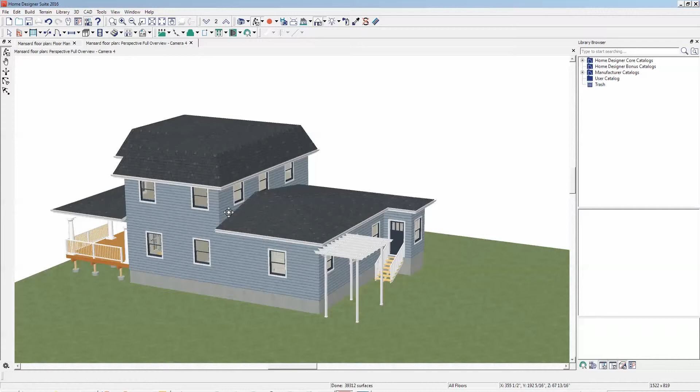Hi, as you can see, I've been working on this, and I'm gonna work on this back. I put a terrain plane in, and I've been fiddling around with the roofs, but I'm gonna go through the steps on how I arrived to here. Now, of course, the porch roof is just something I guessed at. You had a porch there with columns, so I figured you wanted a roof, and so I put a roof there.

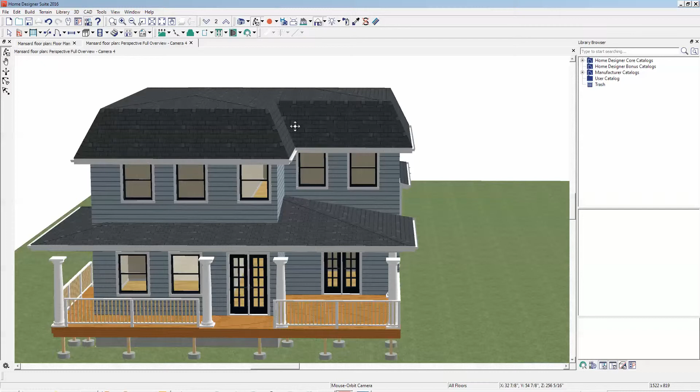But let's get started on this. How did I do the mansard roof? The first thing I noticed about your plan when I opened it was if you go over here to the build roof dialog. Where is that build roof dialog? There it is.

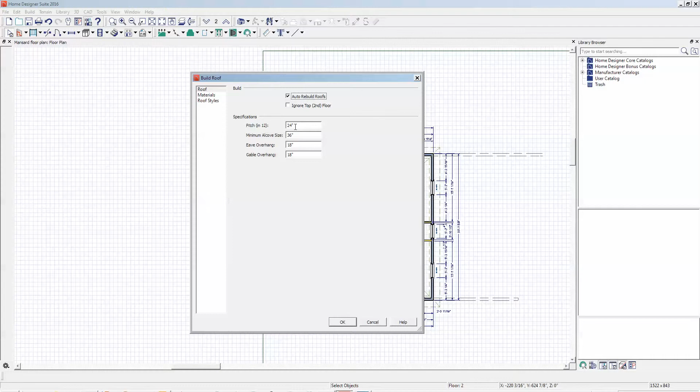I'm going to turn off... I'll leave that on. You've got the pitch set to 24, which is fine for a mansard roof. And that's kind of sort of what we've got.

Now, well, where's the... there it is. I'm not used to the drop down menu. I mean, the menus on Suite. I use a different setup.

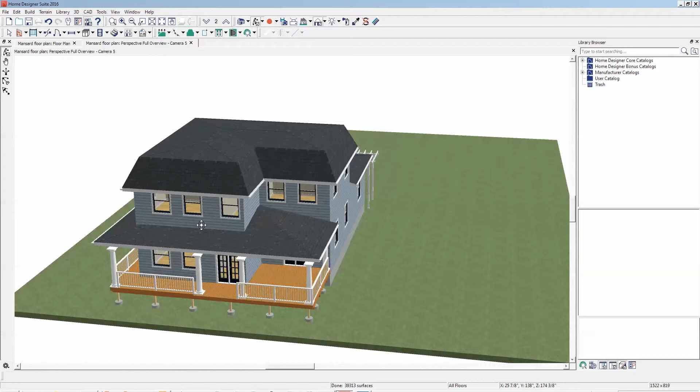So this is 24 right here, 24-12, but of course this is not, and this is not, and this is a lower pitch than 24-12. You can't set everything to 24-12 and have everything come out nice. I mean, I went ahead and worked with it as it was. But let's, I'm going to back up.

Okay, we've got... first of all, for me to do this right, I'm going to change the... I'm going to go to Edit Preferences, and change a couple of things.

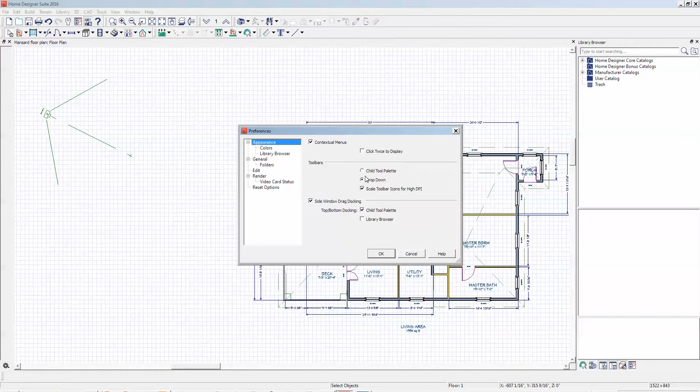Where is that? There we go, toolbars. I'm going to use a child palette toolbars instead of drop down, like is usually there right out of the box. I'm just more used to that because that's the way I have mine set.

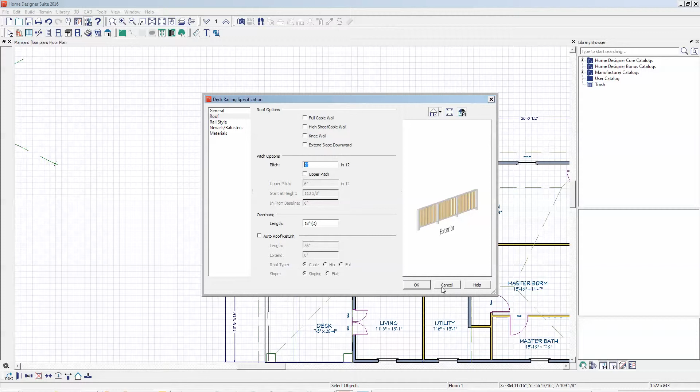Now, how did I get this roof over the porch? What I did was I went to this wall and opened its dialog box, went to the roof tab, and I set the pitch to 2-12. So that this setting here overrides what's set in the build roof dialog at 24 for that wall. And I did that to each wall here.

You open this one, go to the roof tab, you see this set to 2. Every one of these I opened one at a time and reprogrammed them on the roof tab to show 2-12. And that's the kind of roof that we have there now.

Same thing I did here in the back. All the walls in this area here, let's just open one, but I did it for each wall, roof tab, and I set them to 3-12. And I think 3-12 is not going to work on this because, let me show you.

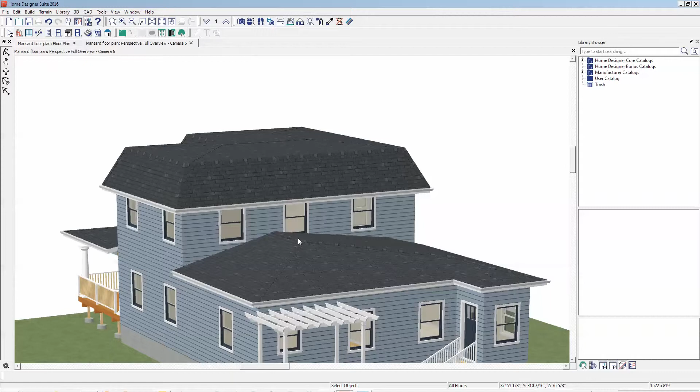I mean, apparently, when you're doing remodeling, you don't want to destroy any windows, so I'd say that the roof pitch at 3-12 back here is too steep. And so I'm going to change this roof to 2-12.

Open each wall and reset it from 3 to 2. And I've got auto rebuild roofs on, so the changes are being made as I make them.

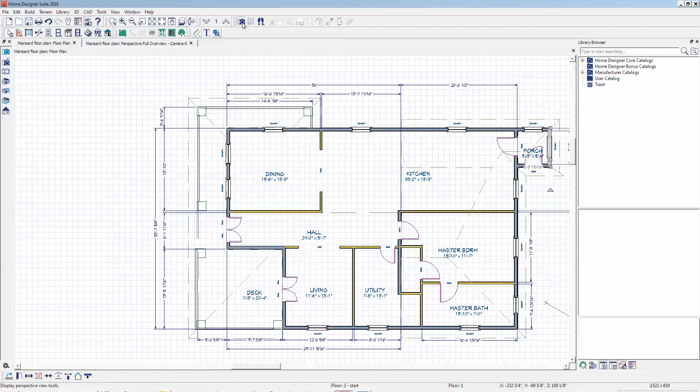Tell you what, we'll do an overview camera. I don't need the library browser, so get rid of that. I'm going to hit Shift key and F6. Get rid of that window.

Okay, you can already see I'm clearing the window a little bit. Let's do this wall here. It's a little bit out of the camera, but it'll help. Okay, can't hardly see the change. That one right there. Now we'll do this one.

And this one. Those are the walls that create that roof system, structurally speaking.

You might have to make this window a little smaller, because that's encroaching on the window, and that's going to create a leak problem. And I don't want to make the pitch any lower. We can, but a 1-12 roof is not going to shed water very well.

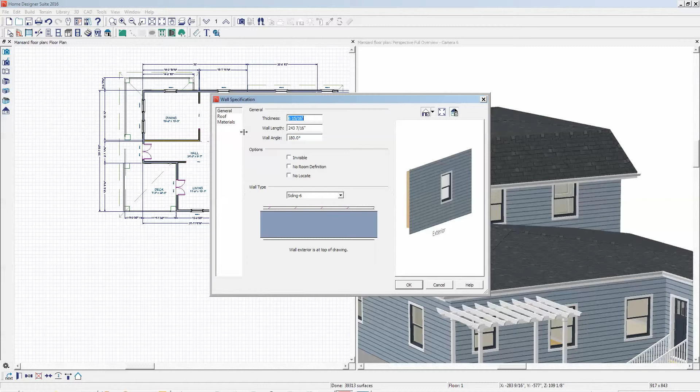But just take this as a point of using the software. That clears it quite a bit better. We can just do the opposing sides and do them at 1-12, and leave the others at 2-12. Yeah, that works a little bit better.

This doesn't look good. Okay, we need to make them all the same, otherwise we'll get some jagged geometry. Yeah, that cleaned that up. See that?

Where's the rotate? Oh, I need to go over here and then click rotate. Yeah. Don't do that. Okay, we got one more jagged edge there. Get that wall, change it from 2 to 1.

And this looks okay, but now this other corner is goofy looking. Okay, so that kind of takes care of that.

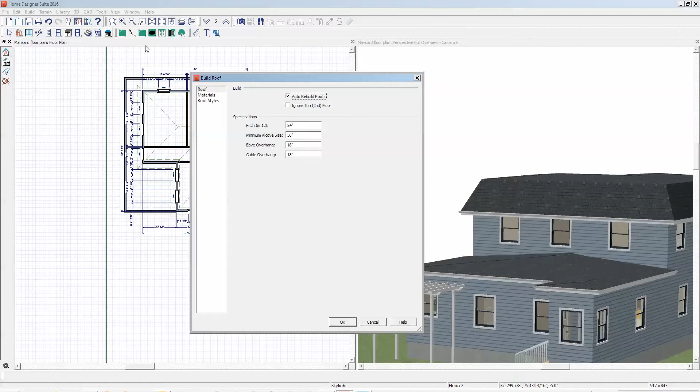Well, I'm not getting it to open. Oh, I see. Okay.

You can see here the pitch is set to 24, and you saw how I manually did the first floor roofs. So, and this is certainly a 24 pitch roof, but how did I do this? You may already know. Oh, okay.

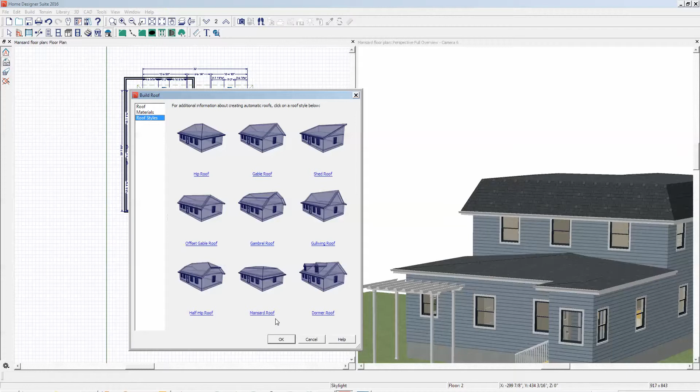Under roof styles, there's a tutorial on how to do a mansard roof right there. But quickly, rather than open this up and go through the whole rigmarole, I'm going to go and, like this wall here...

What I did was I opened it up, went to the roof tab, and the first pitch is 24, and I set the upper pitch to 1-12. I checked this, put 1-12, and I in from the baseline 12 inches.

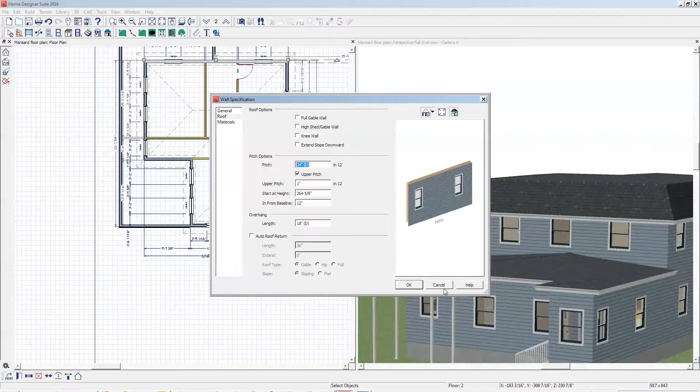So you can see here, the baseline is right here on the outside edge of the framing, and 12 inches in is where it changes from 24-12 to 1-12. I did that to all the walls on the second floor.

Now these automatically generated walls over here, I ignored them. These are automatically, let me just show you, we'll open one. The program created these automatically. See, it's marked no room definition and no locate.

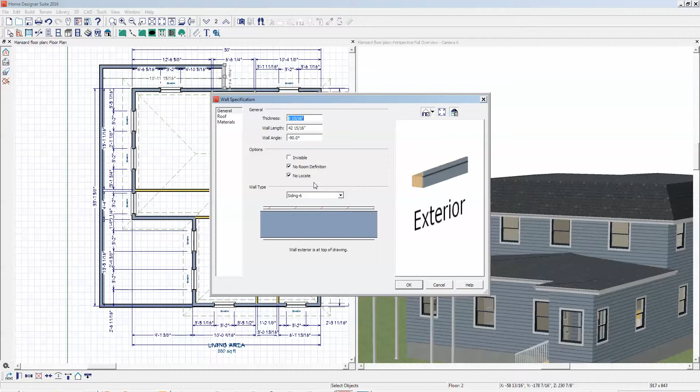And if you were to turn off, we'll go over to display options. Where's display options? I don't see it. Find it this way, just Tools, Display Options. And we'll go down to walls, attic, turn them off in plan view.

Yeah, you can turn them off. If you don't want them cluttering up your views for printing and so forth, then I just don't try to delete them, because the software is going to robotically try to put them back. So just, you can control them by turning them on or turning them off in plan view. But they need to be there to fill in the gaps between roof planes and structural walls, and they just programmed it that way to work.

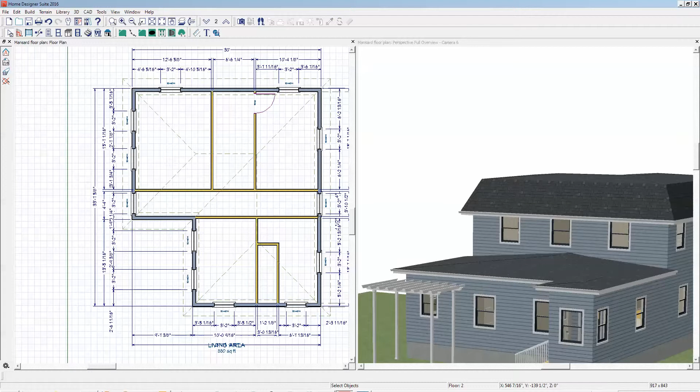Okay, well, that's about it. That's how that's what I found. That's what I did about it, and I hope it helps you out. Thank you.